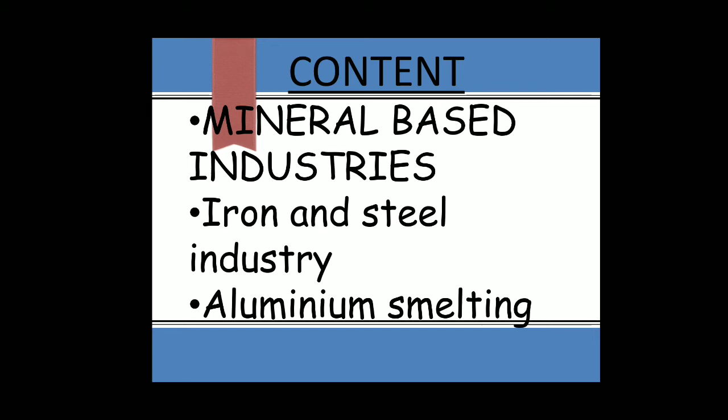Today's content: mineral based industries, iron and steel industry, and aluminium smelting. These two industries I am going to discuss in this video. Mineral based industries that use minerals and metals as raw materials are called mineral based industries.

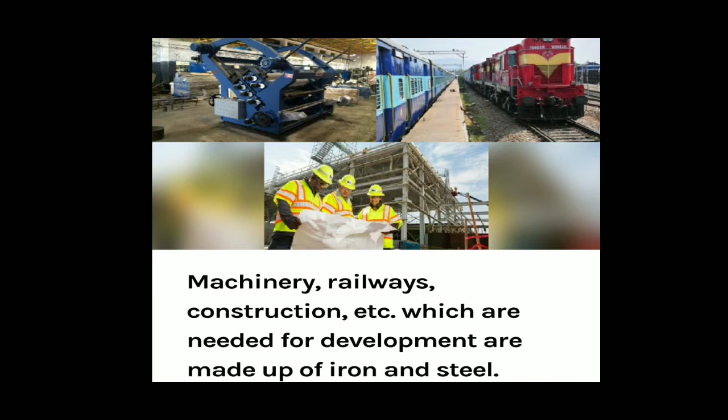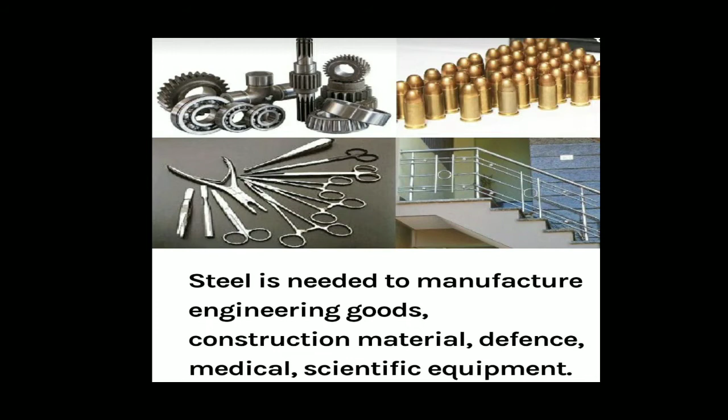Iron and steel industry: the iron and steel industry is the basic industry since all the other industries, heavy, medium, and light, dependent on it for their machinery. Steel is needed to manufacture a variety of machinery, railway, construction, etc., which are needed for development and made up of iron and steel. Steel is needed for manufacturing engineering goods, construction material, defense, medical, scientific equipment, as well as variety of consumer goods. Thus, it is known as basic industry because all other industry, heavy, medium, and light, dependent on it.

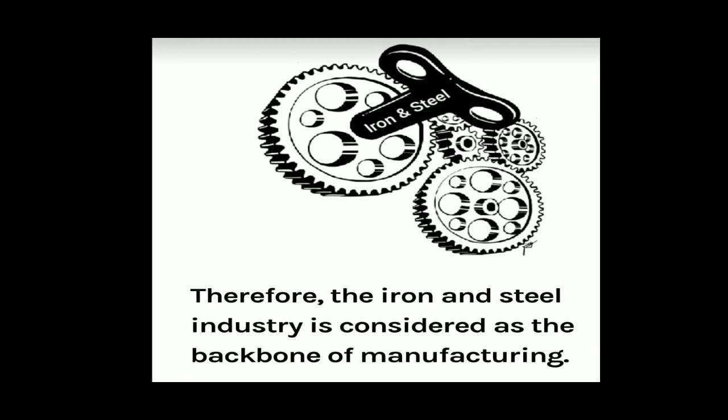The iron and steel industry is considered as the backbone of manufacturing. Production and consumption of steel is regarded as the index of a country's development. Iron and steel is a heavy industry because all the raw materials as well as finished goods are heavy and bulky, entailing heavy transportation cost.

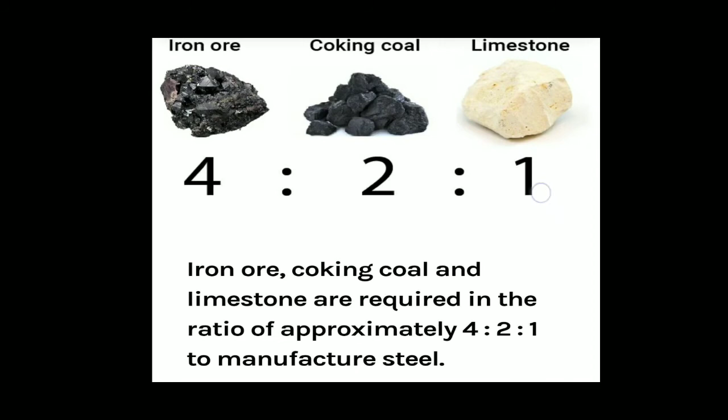For example, see the composition of iron and steel. Iron ore, coking coal, and limestone are required in the ratio of approximately 4 is to 2 is to 1 to manufacture steel. Some quantities of manganese are also required; it hardens the steel.

In 2016, with 95.6 million tons of crude steel production, India ranked third among the world's crude steel producers. It is the largest producer of sponge iron. In 2016, per capita consumption of steel in the country was only around 63 kg per annum against the world average of 208 kg.

So the reason behind it is that in India people are not using steel as much as people in other world countries because it's very expensive. People can't afford it, and the good quality steel is exported to other nations.

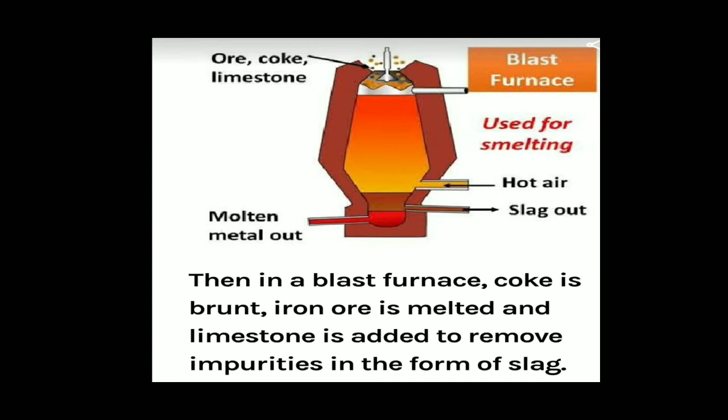Process of manufacture of steel: to manufacture steel, firstly, the raw materials are transported to the plants. Then, in a blast furnace, coke is burnt, iron ore is melted, and limestone is added to remove impurities in the form of slag. After this, the molten material is poured into molds called pigs.

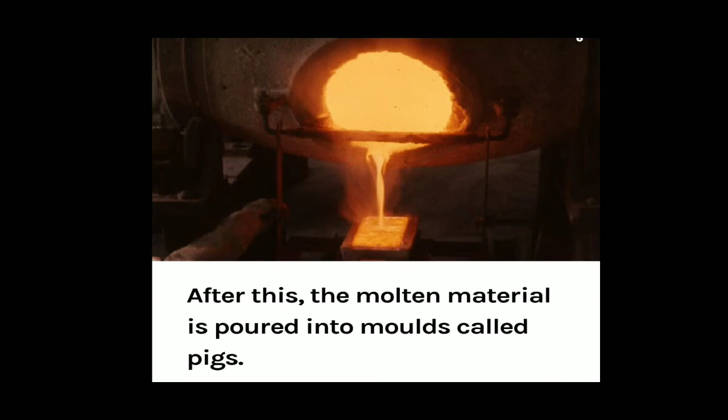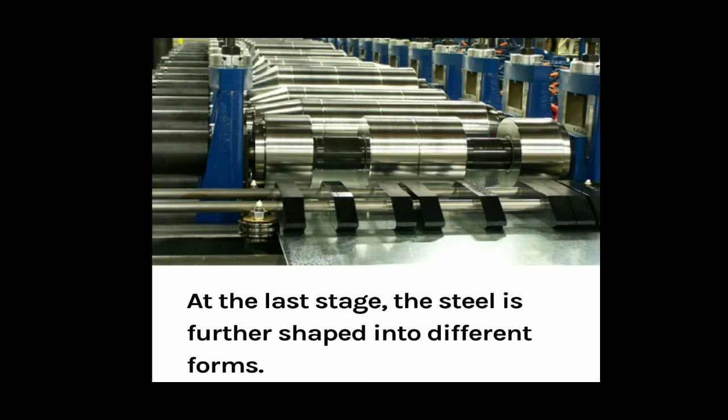Pig iron is again melted to remove impurities, and manganese, nickel, chromium are added. At the last stage, the steel is further shaped into different forms. So this is the process of manufacturing steel.

The process of steel manufacturing takes place in mini and integrated steel plants. Now we are going to see what is a mini and integrated steel plant. When we talk about an integrated steel plant, the size of the plant is established on a large scale, located near raw materials.

The integrated steel plant uses good quality iron ore, and they also use advanced technology. They invest large capital, then fully developed and good quality finished product is generated by the integrated steel plant. Being integrated, everything happens in a single complex, from steel making, rolling, and shaping.

Then the mini steel plant: they are established on a smaller scale and located at any place. They use electric furnaces, steel scrap, and sponge iron. They use less developed technology and have re-rollers that use steel ingots as well.

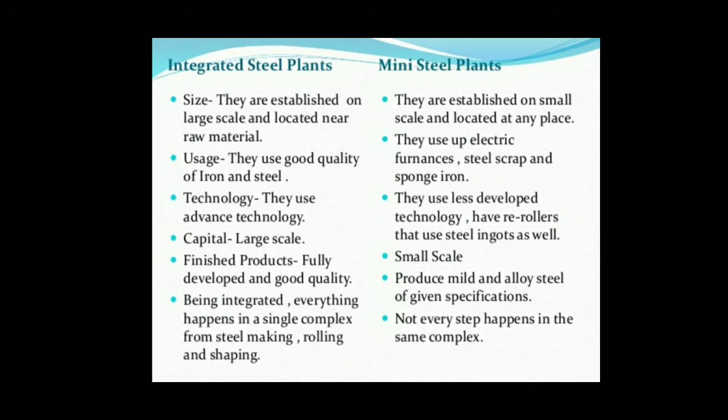A small scale industry in terms of capital investment, it produces mild and alloy steel of given specifications, and not every step happens in the same complex. So this relates to the question: distinguish between integrated and mini steel plant.

Most of the public sector undertakings market their steel through Steel Authority of India, SAIL, whereas the private sector markets through TISCO. In the 1950s, China and India produced almost the same quantity of steel. Today, China is the largest producer of steel. China is also the world's largest consumer of steel.

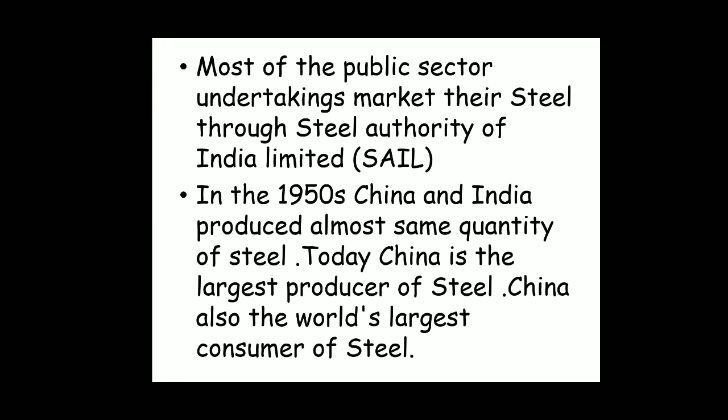Now we are going to see the location of industry concentrated in the Chota Nagpur Plateau region. What is the reason behind it? It is largely because of the availability of low cost iron ore, which is required in manufacturing of steel, high grade raw material in proximity, cheap labor from nearby areas, vast growth potential in the home market, port facility, as well as good transportation and availability of labor. These are the reasons that Chota Nagpur Plateau has the maximum concentration of iron and steel industry.

Though India is an important iron and steel producing country in the world, yet we are not able to perform to our full potential. Explain with reason - this is also a very important question. The reason or the challenges for the iron and steel industry.

First, reason behind it: high cost and limited availability of coking coal, lower productivity of labor, irregular supply of energy, poor infrastructure. These are the reasons.

Now government takes some steps to overcome these problems. What step is taken by the government to face these challenges? First, government has adopted a new economic policy of liberalization, privatization, and globalization. It means interaction of our economy to the world economy. Government is promoting FDI in this sector.

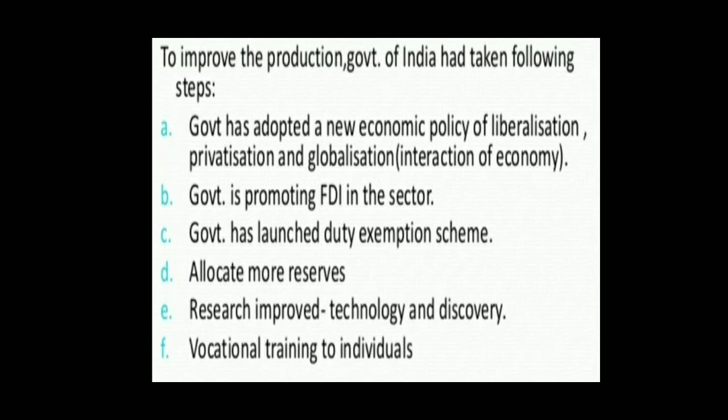Now mark and locate the places related to iron and steel plants. So we are going to see the work as assignment: Durgapur, Burnpur, Bokaro, Jamshedpur, Rourkela.

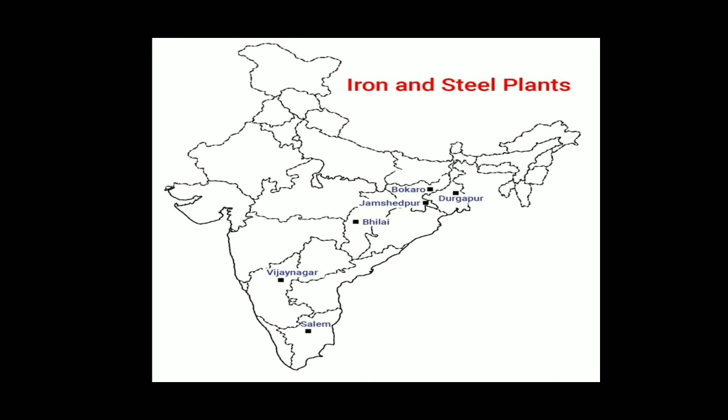Have you seen all these related to the nearby places like West Bengal - Durgapur, border of Jharkhand and West Bengal; Burnpur, Bokaro in Jharkhand; then Jamshedpur in Jharkhand; then Odisha, Rourkela; then Chhattisgarh, Bhilai; then in Karnataka, Vijayanagar and Bhadravati; and then Tamil Nadu, Salem. These places you mark and locate as assignment.

What do you mean by mineral based industry? One mark question - definition. Distinguish between integrated and mini steel plant - 3 marks. Why is iron and steel industry a basic industry and heavy industry? This is in the starting.

It is a basic industry as it provides all material to other industry - heavy, medium, light - all these industries depend on it for their machinery. Steel is required for engineering goods, construction material, defense, medical, telephone, scientific equipment. It is a heavy industry because all raw material as well as finished goods are heavy and bulky, entailing heavy transportation cost.

Why does the Chota Nagpur Plateau region have maximum concentration of iron and steel industry? This I have explained already. India is an important iron and steel producer, yet we are not able to perform to our full potential - this also has been given in points by me.

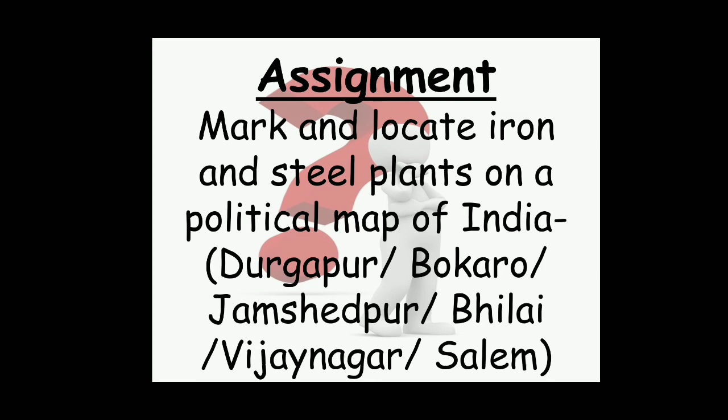Now assignment: mark and locate iron and steel plants on a political map of India - Durgapur, Bokaro, Jamshedpur, Bhilai, Vijayanagar, Salem.

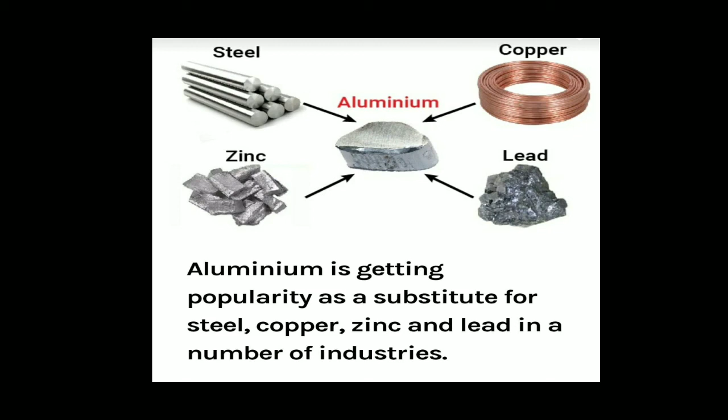Now let's discuss the second important metallurgical industry, aluminium smelting. Aluminium is getting popularity as a substitute for steel, copper, zinc, and lead in a number of industries. It has many properties like being light in weight, resistant to corrosion, a good conductor of heat, malleable and ductile, and it becomes strong when mixed with other metal. So it is very good industrial material. It is used to manufacture aircraft, utensils and wires.

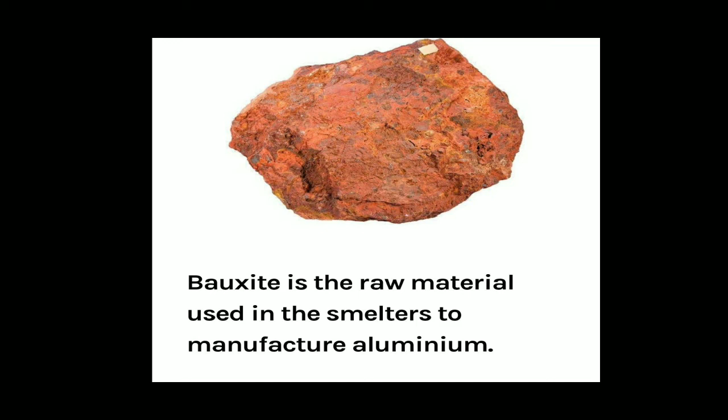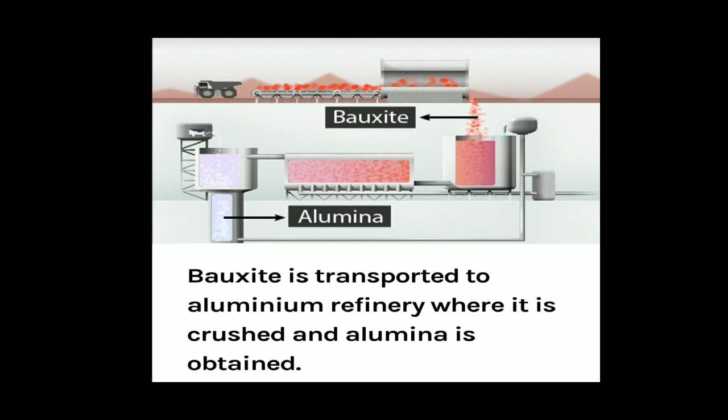Bauxite is the raw material used in smelters to manufacture aluminium. Process of manufacturing aluminium: bauxite is transported to the aluminium refinery where it is crushed and alumina is obtained. Then this alumina is sent to the aluminium smelter where it is converted into aluminium.

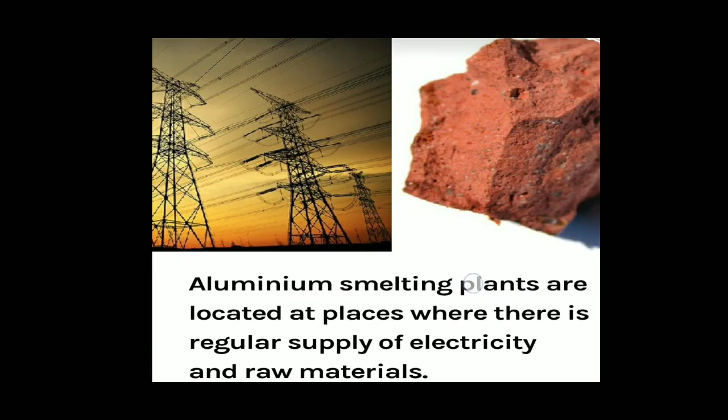Location of aluminium smelting plants: aluminium smelting plants are located at places where there is regular supply of electricity and raw material. Aluminium smelting plants in the country are located in Odisha, West Bengal, Kerala, Uttar Pradesh, Chhattisgarh, Maharashtra, Tamil Nadu. So that's all for today.